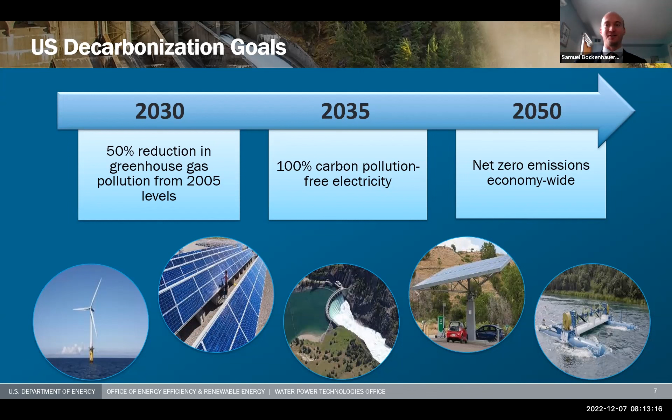I think the importance for hydropower is that it has an important role to play as the system is changing so rapidly. An example is pump storage hydropower, where we're seeing operations changing really rapidly due to more variable renewable energy. The graph shows the Helms pump storage plant in California shifting over years from pumping primarily at night to pumping multiple times during the day as well, to basically balance the variability in solar coming on in the middle of the day in much greater amounts.

Between 2013 and 2015, 2016, you saw a really huge shift that corresponds to that dip in the duck curve on the previous slide. So I think this speaks to the ability of pump storage to enable additional variable renewables to come online, really supporting this expanded deployment of variable renewables.

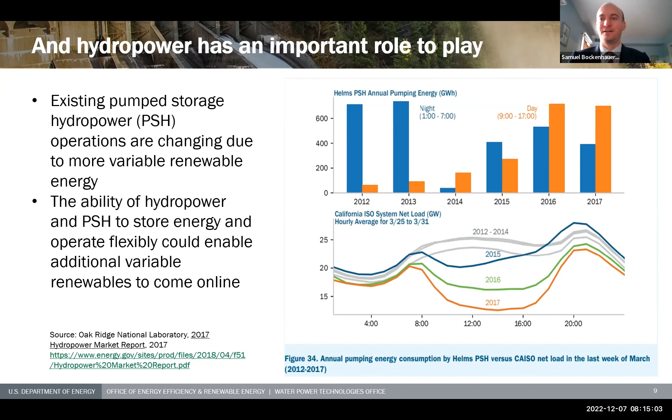We see similar operational changes worldwide, so this isn't just a US thing. I'm showing an example from Japan, the Omarugawa pump storage power station. You're seeing really the same thing: start-stops, a similar measure of pump storage operation changing, the numbers changing quite a bit even in a short span of years, which directly maps to the amount of increased solar coming online, shown in the lower graph. This is in Kyushu, one of the islands in Japan that has a lot of solar coming online.

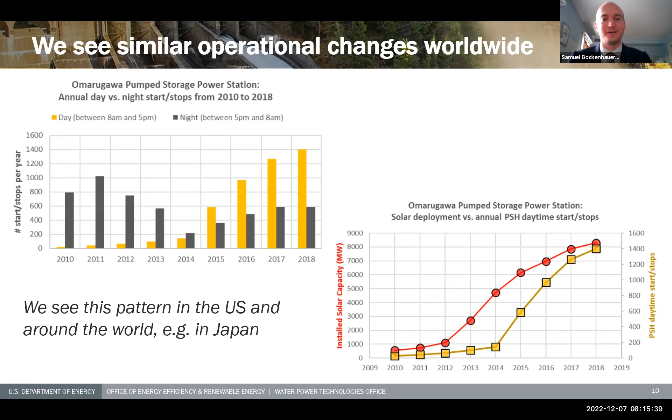There are also new market structures that we're seeing that encourage hydropower flexibility in the US. The Western Energy Imbalance Market is an example. What I'm showing in this graph is just a plant's generation over one day, and you see that it's not a flat line—it's changing quite a bit, moving on even 5 minute or 15-minute increments. These market structures are driven in part by the growth of variable renewables and the need to change operation quickly.

And so hydropower is taking advantage of these opportunities. There are also challenges too: if you're moving so quickly, if you're changing your generation so quickly, you may be increasing wear and tear, and that's something owners and operators are seeing too. But really, this is driven, in part at least, by the renewable generation coming online.

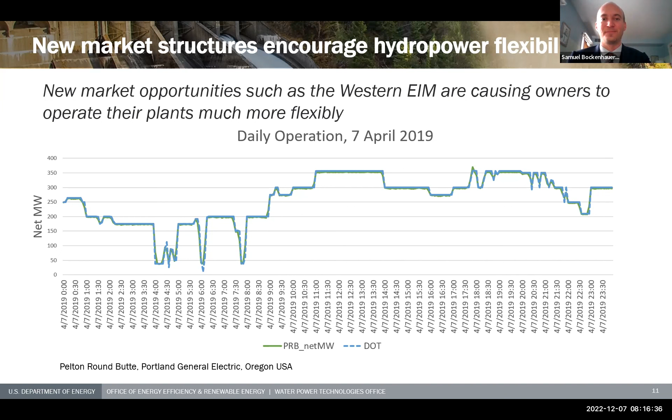And then stepping back a little bit to think about the energy storage role.

So pump storage hydropower, as people on the call may know, is really a battery. It's able to store excess energy the same way that batteries are. But even reservoir hydropower has a lot of storage capability because you're storing water behind a dam.

The International Energy Agency did a rough survey worldwide of how much storage potential there was from pump storage and hydropower. The yellow square is batteries, including EVs. The dark blue square is pump storage worldwide, which is quite a bit larger in terms of energy stored. And if you count reservoir hydropower, it's enormous—much, much larger than either of those two.

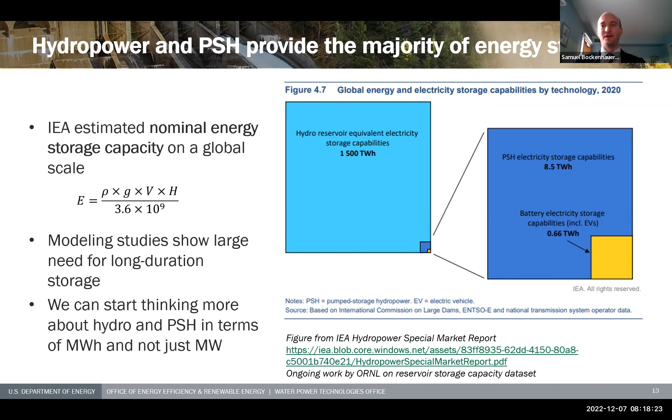I think this speaks to the ability of hydropower to provide a lot of energy storage. It makes clear that we should think about hydropower also in terms of megawatt hours of energy stored, not just in terms of generation. Next slide.

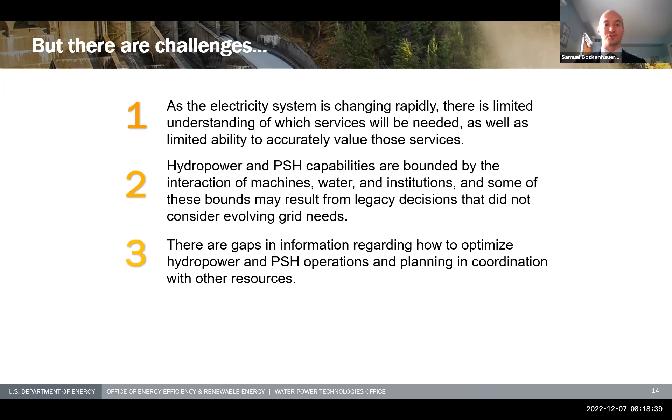So that's kind of how we see the landscape. I think there's a lot of capability that hydropower has, but there are, of course, challenges. As the energy system is changing so rapidly, there's a limited understanding of what types of grid services will be needed—what types of flexibility, what types of storage, firm capacity is really important. And valuing those services is always a big challenge. Who's going to pay for them and how much are they worth? Those are big sticking points and challenges across the power industry.

The second challenge: hydropower and pump storage capabilities are bounded by the interaction of machines, water, and institutions. There's a lot of complexity, and some of those decisions, especially the institutional ones, were made decades ago when plants were built. As we're seeing plants being relicensed, they may be asked to do things that weren't in their original mandate. So balancing environmental impacts is a really critical thing, and I think we'll hear more about that from other speakers.

There are also gaps in information about how to optimize hydropower and pump storage in planning and coordination with other resources. Lithium-ion batteries are well suited to provide some types of storage, but for other types, especially longer durations, pump storage may currently be better suited. Finally, on the technology side, current hydropower and pump storage technology may not always be designed for flexible operation. If you're asking for many more starts and stops per day, or a ramp rate that moves up sharply to balance solar coming offline in California, the technology may need improvements and enhancements. Next slide.

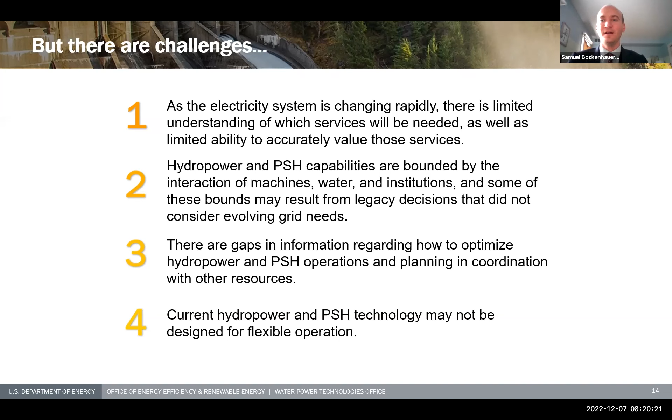There are a lot of opportunities too, and that's the reason we have this work at DOE focused on this issue. The HydroWires initiative, which I lead, is focused on understanding, enabling, and improving hydropower's contributions to reliability, resilience, and integration—really supporting this decarbonizing role of hydropower. Next slide.

We've got a number of research areas and different projects from the DOE national laboratories, industry, and academics, including Sarush and his team in this initiative. Some of the broad areas are organized under: value under evolving system conditions—quantifying the value of pump storage, understanding market and policy implications; and capabilities and constraints—improving capabilities to model hydropower, which is really a challenge due to those conflicting constraints we just discussed.

Quantifying operational trade-offs as well, which I think we'll touch on today. Operations and planning—thinking about how to increase flexibility through operational strategies. And technology innovation—increasing flexible capabilities by developing new technologies, hydropower hybrids, new types of pump storage. That's all within the type of work we try to do. Next slide.

One interesting project for this topic of the role in decarbonization is spurred by this question: okay, hydropower can enable more megawatts of variable renewables because it's flexible. That's something easy to talk about, but at DOE we want to be quantitative and try to be as rigorous as we can with these types of statements.

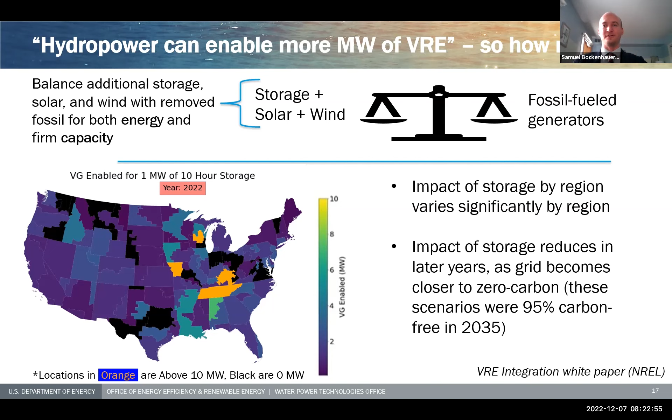Some of the rough results we find, with a lot of caveats, is that storage can enable around 1 to 2 megawatts of wind and solar per megawatt of storage. And 10-hour storage, such as you may get from pump storage, is much more effective at enabling wind and solar deployment relative to 2-hour storage, which would be a shorter duration lithium-ion battery. So this is the type of work that we're trying to do.

Sometimes, even with complicated questions, we need policy rough cut estimates that we try to understand and communicate.

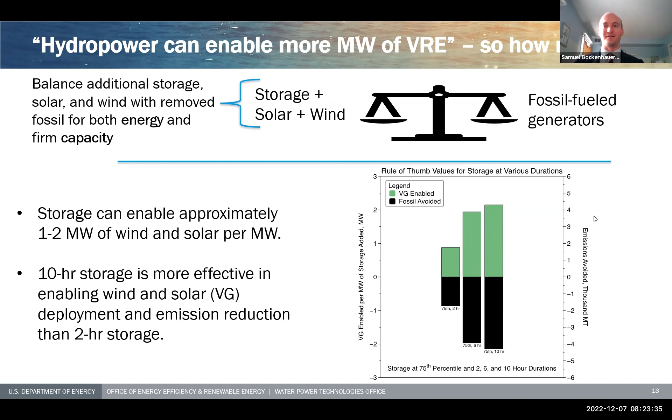Ultimately, what we're trying to find is whether there are win-wins—examples where you could increase flexibility through some operational change or even technology, and also improve habitat downstream for salmon nests or bottomlands habitat or whatever it might be. So there's a possibility for win-wins, even though it's very complicated and you need to look at the full picture.

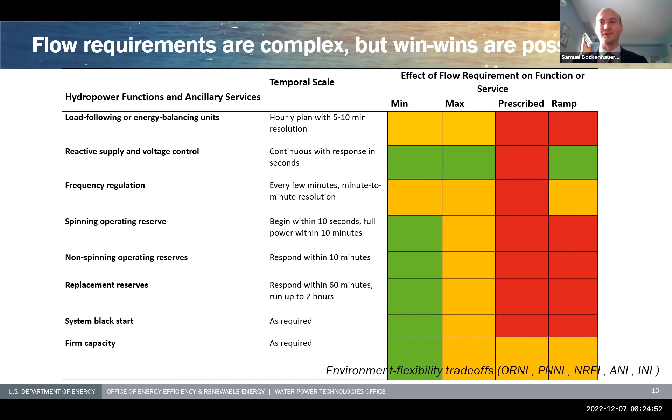We've also got some work on pump storage hydropower—I'll speed up a bit to make sure I don't go over. One myth we sometimes hear circulating is that to build new pump storage, there are no sites available, or it's too hard to find the right site. There are a lot of constraints on where you could build new pump storage in the US.

What we've done is a resource assessment, and we found there are quite a large number—15,000—if you just look at the geography and where it might be possible, excluding national parks and lands that would otherwise not be suitable. That's not to say anyone would ever develop all of these sites, but it's something that can be considered. We're working with developers to make this more accurate and understanding what type of research questions this would spur for us.

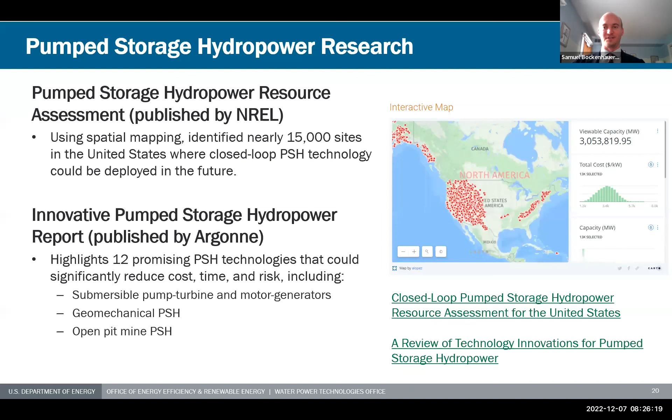There's also some innovative pump storage hydropower work we're funding on completely new technologies that could avoid some of the challenges of deploying conventional pump storage. Is there a way to reduce the footprint of a plant by basically making the turbine underground without a powerhouse, digging straight down and avoiding having to excavate a large part of the mountainside, to save on cost and reduce the impact?

We've also got some other work—just teasers here—on hydropower hybrids demonstration. We've demonstrated, working with Idaho National Lab and other national labs, a way to add a battery to run-of-river hydropower plants to increase their flexibility and allow them to do black start. So if the power system were to completely turn off, adding a battery to these hydropower plants lets them basically reboot the power system, which is something they wouldn't be able to do without that type of hybridization.

There are further out white papers we're working on related to long duration energy storage compensation mechanisms—how can you assure financial return on investment if you're going to build a new pump storage plant, for example?

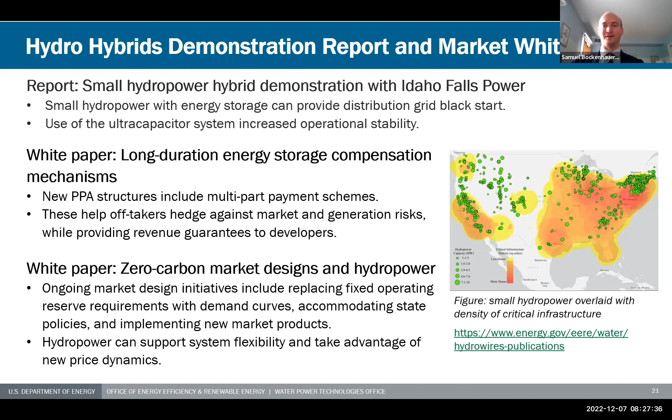On zero carbon market designs and their impact on hydropower: as we get an increasingly renewable system, the entire structure of the market may need to change as penetration gets really high. What does that mean for hydropower? I think the upshot is there could be a lot of opportunity as a flexible resource with inertia that is still able to remain on the grid.

Finally, international collaboration on hydropower. I'd note we're not building much new large-scale hydropower in the US right now, since a lot was built in the past. But there are some new smaller scale projects, and a lot of projects in the pipeline for pump storage.

So we're really looking to international partners for increased learning. There are countries around the world who have figured out how to build pump storage in recent years and been really successful with that. I serve as chair of the IEA Hydropower Technology Collaboration Program, which includes a lot of different work across hydropower.

That's it for now, and I'll close here, but I'd say we are doing a lot of work. I'm happy to talk more to anyone interested, but the point is, hydropower is complex. There's a lot of opportunity there, and there are challenges, but we do see it as part of the climate solution, and that's why we're supporting this type of work. Thanks.

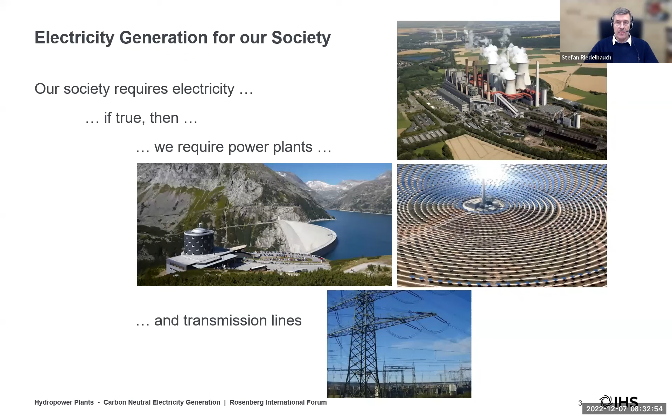So with these options, the real remaining question is which of the available power plant technologies do we want to deploy? It's clear that all power plant solutions affect the environment—air, rivers, ocean, soil—and that affects plants, animals, and humans. The real question is, what are the ethical criteria for the decision? Is it renewability, sustainability, or pure economic considerations? That's what we have to decide.

With this presentation comes a plea for the utilization of hydropower technology, because I'm really convinced that this technology supports renewability and sustainability as it should be.

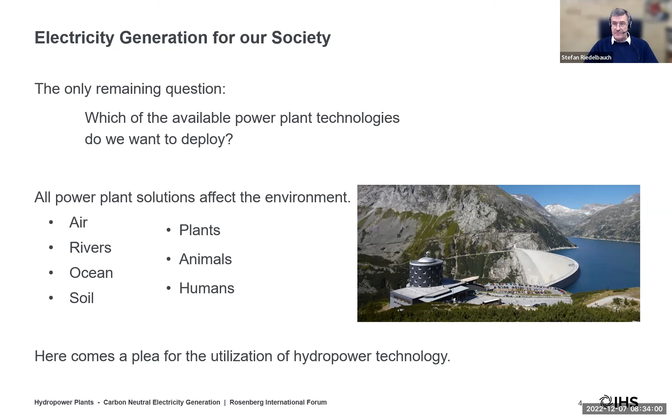The water which is moved from the ocean up to hills and mountains represents an increase of potential energy, since the water is lifted higher than sea altitude. Then if it moves back down to the ocean, we have kinetic energy. Hydropower plants convert both potential energy and kinetic energy. So hydropower is driven by solar power in an indirect way, and this is a truly sustainable and renewable energy source.

A possible definition of renewable energy is that it is energy collected from renewable resources that are naturally replenished on a human timescale. This is certainly true, because if the sun didn't exist anymore, life on Earth would be very unlikely.

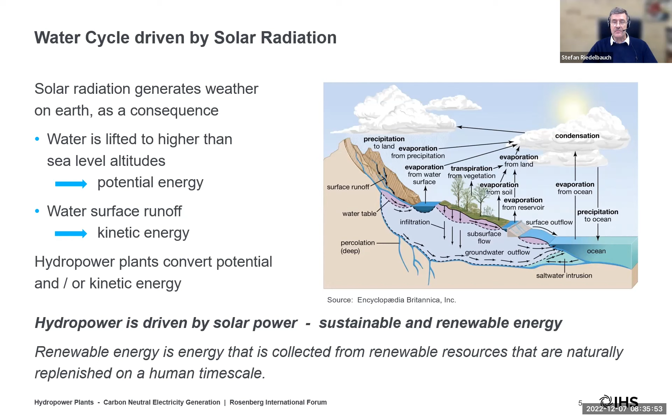Here comes a couple of examples for potential energy conversion. We see different types of hydropower. One is a pumped storage plant, Raccoon Mountain in the United States. We see the upper reservoir here; the plant is somewhere in the hill, an underground cavern powerhouse, and this is the tailwater, which I believe is the Tennessee River. So this potential energy difference can be exploited and converted to electricity, and vice versa.

Electricity can be converted into an energy reservoir here. Very similar systems are also available in Austria. You have pump storage plants, or just storage plants—in this case Cana Brava in Brazil—which can be used as base and peak load. This is also true here, but we will see that these kinds of plants are typically used for frequency control.

So this overall system is really a conversion of energy without thermal processes. This means we can have continuous electricity generation, kind of as a base load, but we can also have very fast power changes to support the stability of the electrical grid. This is really a key advantage, because everything in the power plant business related to thermal processes is relatively slow.

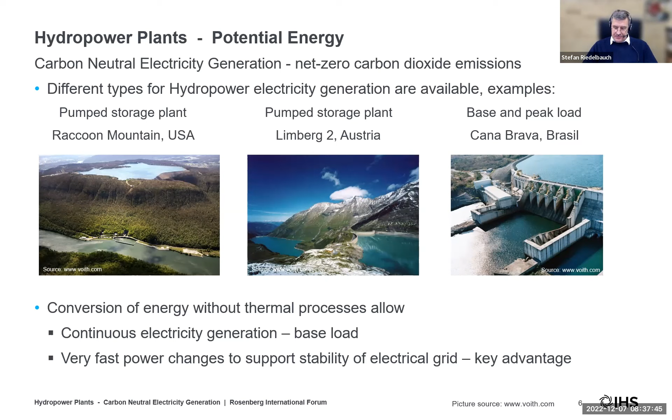Another truly renewable and sustainable energy resource comes from gravity, based on mass attraction within our planetary system. We have the sun; the Earth rotates around it and moves around the sun; the moon rotates around the Earth, which is also rotating on itself. This is again truly renewable and sustainable, because if the sun didn't exist, mass attraction would disappear too, and no life would be possible anymore.

Gravity forces in certain parts of the world generate tidal currents. Very high tide and low tide occur here in the Bay of Fundy in Canada. The elevation change of the water level of the ocean is very large, which means that somewhere in a narrows we have very large tidal currents. The advantage of converting this to electricity is that tidal currents are very well predictable, and therefore the electricity generation is also very well predictable.

This prediction is less reliable for wind and solar generation, because if you have clouds, or just no wind, or cannot predict very well, you always have some uncertainty and very much fluctuating electricity generation. But with tidal energy, it's well predictable and foreseeable.

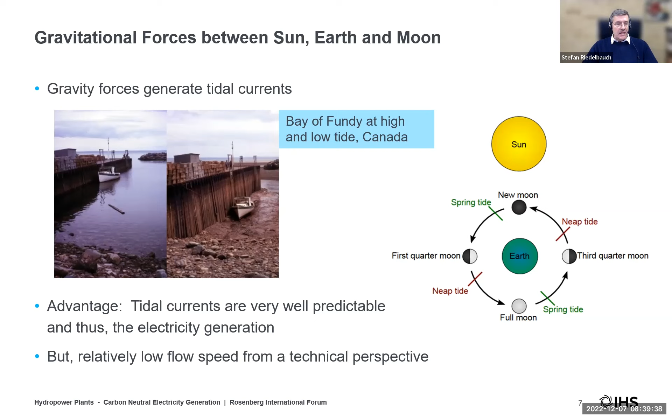An example for the conversion of tidal energy is this system, a floating trimaran. This is a view from above, and here the trimaran with a view from below. This device is anchored and sits at a specific location, and in this case has six propellers which convert tidal current into electricity. You need to have some cable towards land, and so forth.

As an example, at our institute we made some simulations of such a configuration. You see a cut here through the flow field, showing the six propellers and their respective wake flow. We can identify the interference between those propellers and also predict the performance of such a device under the given tidal conditions.

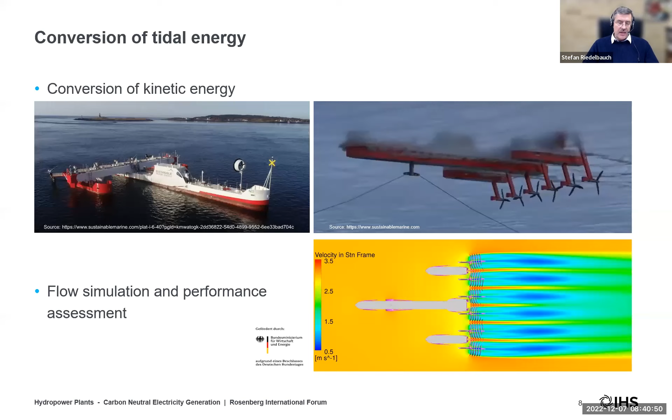There are other concepts which convert kinetic energy, concepts like propeller turbines, very similar to wind turbines, or shrouded propellers, which could be used in rivers because of the limited height and limited depths of the rivers. Those are really for pure kinetic energy conversion, and those would serve essentially as base load.

When we look at tides, this is an example of a performance prediction of a project area, in this case the European Marine Energy Center. We see here the back and forward flowing tide. We can simulate the tidal current and then add a large turbine array - all these dark dots are turbine arrays, turbines. Based on the tide, we can predict the power generation of each individual turbine, and also the interaction between those turbines, to find the overall performance of a project area. In this case, I believe there is something like 300 turbines in this turbine array.

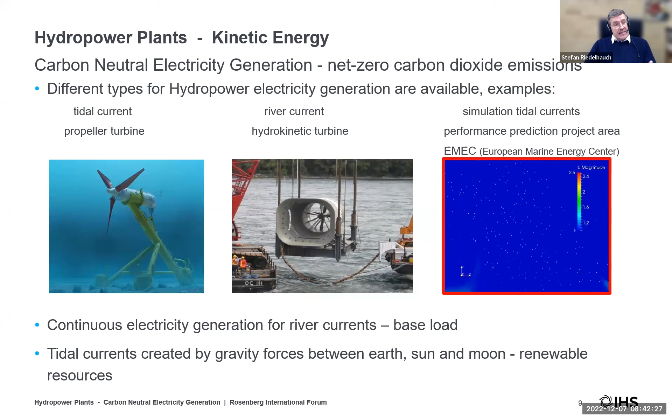So these are the possibilities which I consider to be relevant for hydropower, and then we want to compare this to the requirements and the properties of the electrical grid.

We see that the power demand is constantly changing, varying all the time, and we have seen this in the earlier presentation of today. But it's also a fact that the electrical grid as such has no storage of electricity - there is only conversion. We can use batteries, but this is energy conversion. We can use hydropower pump storage plants, which is also energy conversion. So if you want to really have a safe and balanced electrical grid, we need prompt generation of electricity.

This can be visualized like this. We can state that the grid frequency really is a measure for grid stability - like a balance, we have on one side consumption and on the other side generation. Don't worry about the frequency value itself - this is for Europe, in the United States you might have 60 hertz, but it's the same principle. So if consumption and generation is really in balance, we have probably a nominal frequency of about 50 hertz.

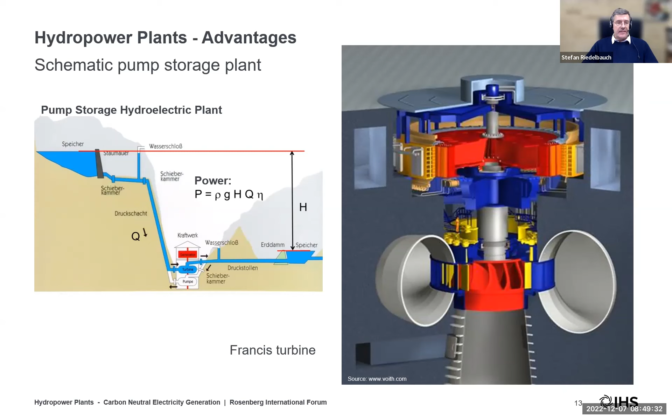An example for very fast reaction times, which are needed for this flexibility of our electrical grid, is presented here. This is a pump storage plant in southern Germany, and a schematic about operational transition times.

We have a standstill condition, and if we want to go to generating mode, we can come up to synchronous speed of all the rotational masses within 70 seconds. Then the generator is synchronized but still has 0 megawatts. In another 30 seconds, we can increase the power up to the maximum power of the individual unit. In this particular case, there are 4 machine sets, so in total this plant has almost 1,000 megawatts.

The same is true for the pumping operation. We can go from standstill within 105 seconds to a consumption of almost 250 megawatts, and this would be possible for all 4 machine sets, so consuming roughly 1,000 megawatts. Also from pump to generation, the conversion times are very short.

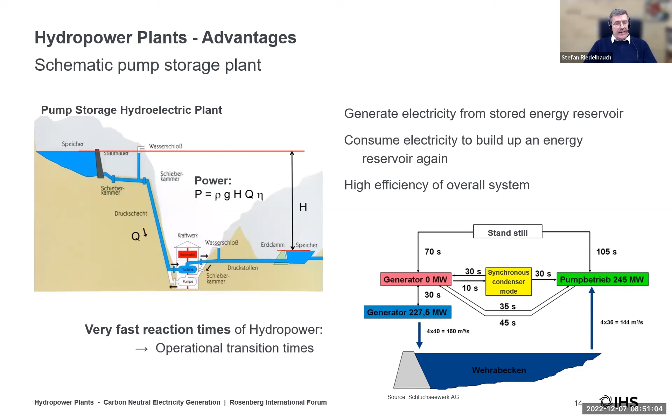So maybe give me four more slides here.

If you look at research requirements, because of the high flexibility needed and fast operational changes, we need to look into flow simulation, which defines the loading of machines, structural dynamics and the answers related to lifetime, plant dynamics for fast operational changes, or combining all of this, as well as model testing and so forth.

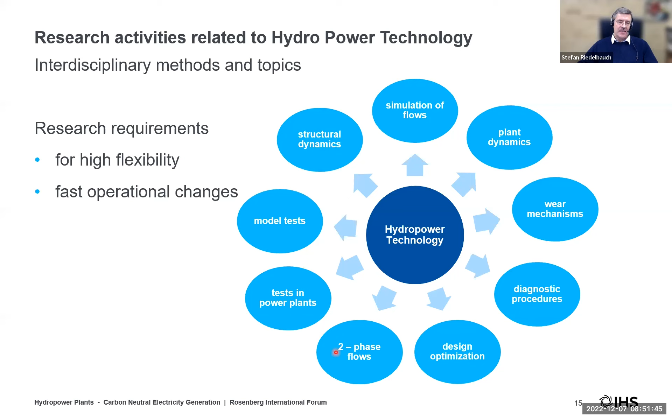As the time is relatively short, I prefer now to jump into 2 or 3 examples. This is an example about operational transients in turbomachinery, where we can predict the behavior under operational transients of such a plant, which is a real plant in Spain in this case, and see what happens.

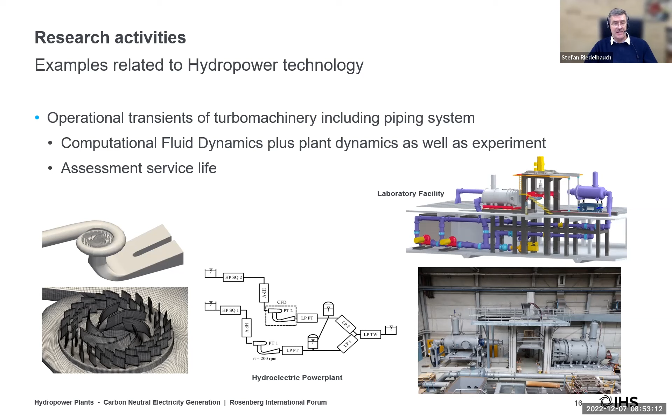What happens if such a pump turbine moves from a steady state pump operation point towards a steady state turbine operation point? We are working in our institute on these kinds of problems. Because this involves very complex and challenging numerical approaches, we may want to validate this, and in our lab we have such a laboratory facility—this is a real view of it. It's a relatively large facility, able to perform operational transient simulation in an experimental way, and with an instrumented model turbine we can find dynamic strains and stresses within turbine equipment.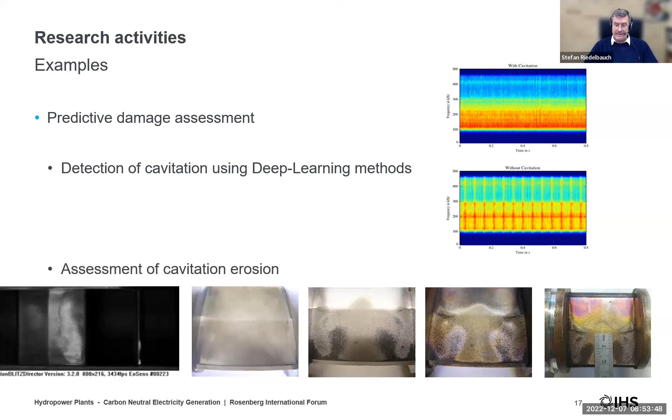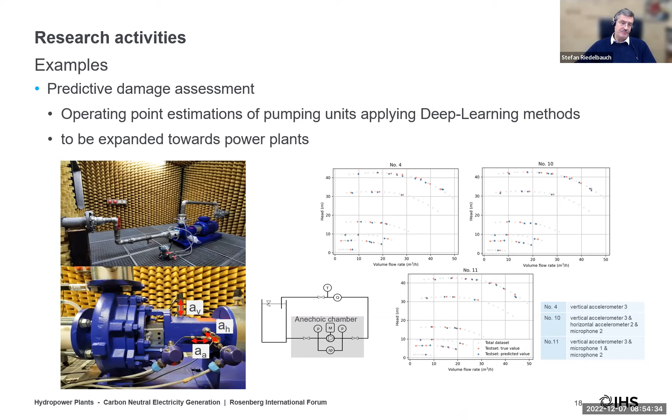A third example is operation point estimation on pumping, again using convolutional neural networks. We have a simple pump equipped with sensors to gather a lot of data, and we see to what extent we can predict the head flow curve, the typical pump characteristic, based on those signals only. In this example, all the gray points are the learning data, while blue means predicted value and red is the real test value, the ground truth.

For exactly predicting the loading within a turbine, we need very accurate prediction of flows in the turbomachinery, not only for optimum conditions but also for extreme off-design and operational transients. For this, we look at very large flow simulations, which at maximum may have 100 million flow elements, using a very large supercomputer at the University of Stuttgart. This lets us predict relatively accurately the loading of the machine, and then come up with fluid structure interaction topics to assess the lifetime at extreme off-design conditions relative to optimum conditions, as well as operational transients. So it's basically a prediction and simulation of forced vibration.

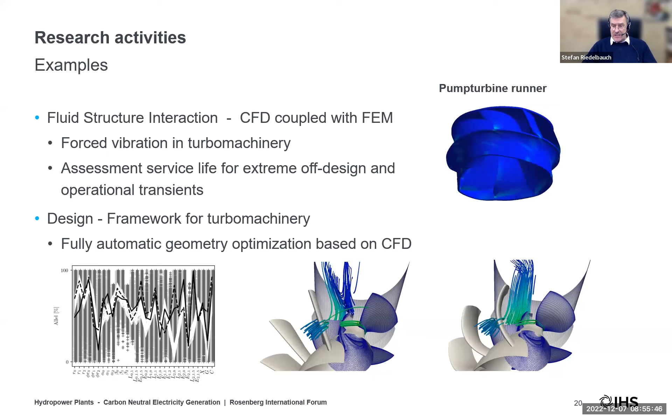I'll skip the lower part and come to almost my last slide. This again shows the European Marine Energy Center in Scotland, the Orkney Islands, where there is a large number of tidal current turbines. The same systematics and methods can be used for river flow prediction, because for these hydrokinetic turbines, you again want to identify locations with high flow speed to get maximum conversion of electricity.

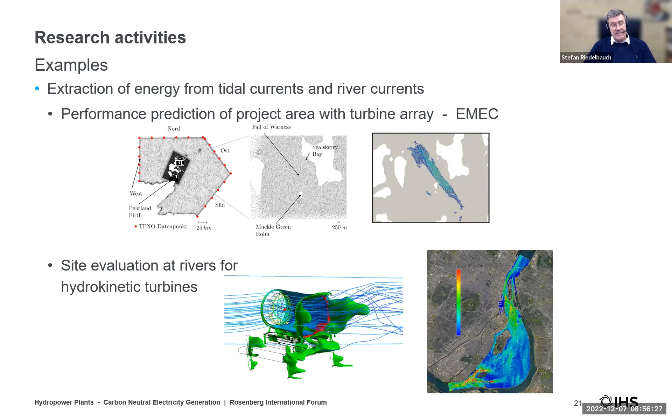As a summary, hydropower plants have very high efficiency levels of energy conversion compared to all other power plants. They have very high flexibility and capability for fast and very fast power output changes within one minute or less, and excellent capability for stabilizing electrical grids with a high share of volatile renewable energies such as wind and photovoltaics. Of course, hydropower plants are typically multi-purpose plants.

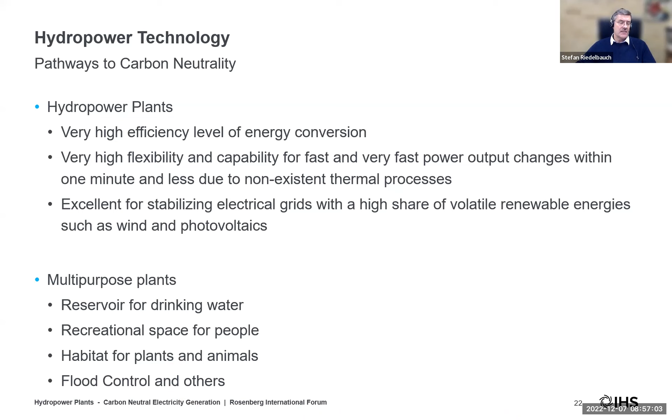Thank you very much, Professor Riedelbauch. Two excellent talks on hydropower, one from a top-level research program point of view, and this one more from a technology point of view.

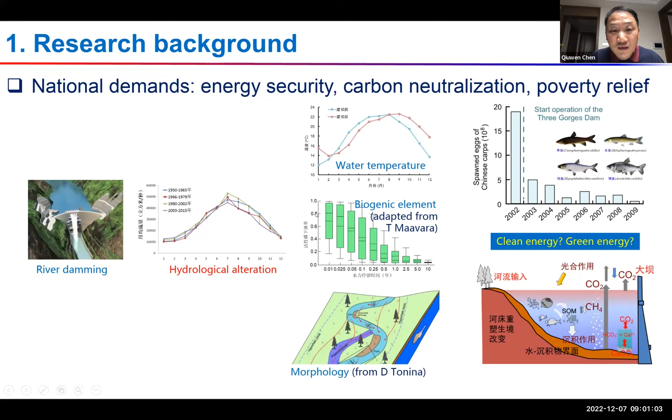So I will give my talk focusing on two research areas. One is the Upper Yangtze River, where we have 5 dams in cascade. The other one is the Upper Mekong River, which has more than 11 dams, but I will study 5 of them.

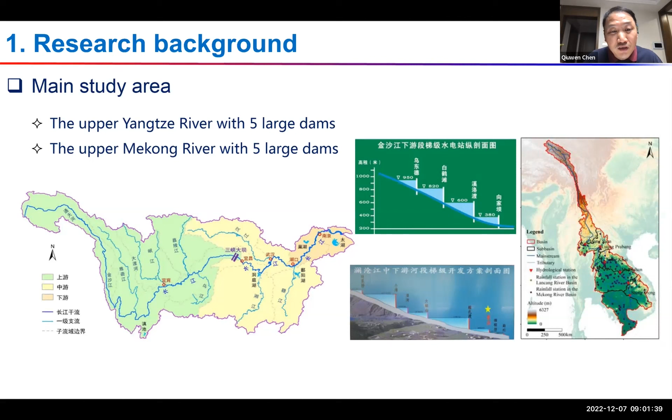In China, the eco-environmental impact has been studied for a long time. Why do we continue this work? Because in China, we like to build high dams—we have dams more than 300 meters in height. So the impacts are somehow different from others around the world.

So now I would like to give some information about our recent research on the impact on biogeochemical cycles. Where's the knowledge gap? For instance, in the publication from Taylor Maavara at Yale...

She reported that the retention of nitrogen and phosphorus will increase with time. However, in the Mekong River Commission report, before and after the impoundment of the cascade reservoirs, the bioavailable phosphorus increased with time. Of course, urbanization and population increase will have more input of nutrients. However, the point is not only that the amount is increasing, but also that the species composition of the nutrients is different from upstream to downstream along the reservoirs.

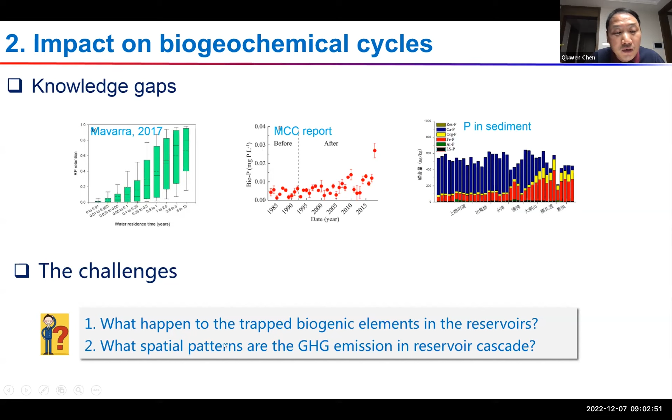So the question is, what happened to the trapped biogenic elements in the reservoir, and what's the spatial pattern of the greenhouse emissions in these reservoirs? So we did a lot of sampling along the reservoir for a number of years.

We found that after river damming, although the total nitrogen and phosphorus don't have much change, the composition changed a lot. From upstream to downstream, the phosphate increased, but the total nitrogen kept stable. Also, from upstream to downstream, we found the total nitrogen is almost stable. However, looking at this figure, we found that ammonia increased and nitrate decreased. Then looking at the composition of the minerals, we found calcium decreased, but the ferric iron increased.

So we proposed a conceptual mechanism: after river damming, the water becomes stagnant somehow, and this stimulates the growth of algae, which absorb the nitrate and dissolved phosphorus. After the death of the algae, they sink down. In the deep reservoir, there's an anoxic layer, and due to reduction, we get decay of the organics, which produces ammonia. Also due to the reduction environment, we get the release of phosphorus, which is the reason that stimulates or increases the delivery of bioavailable nitrogen and phosphorus downstream.

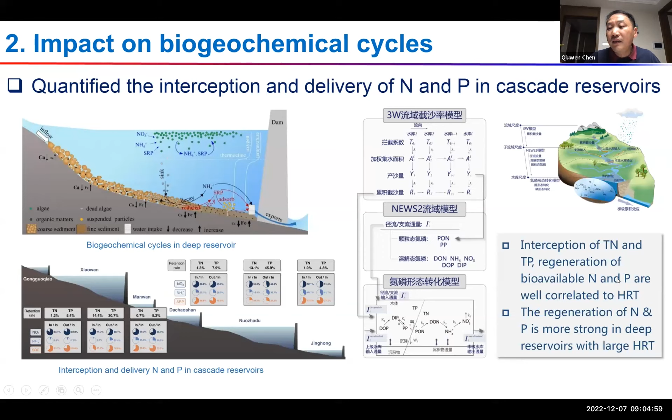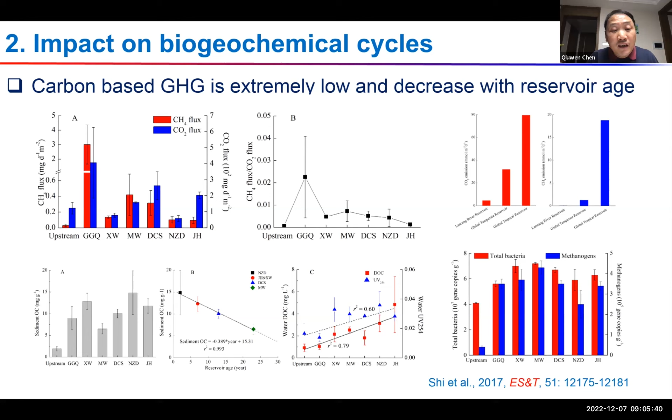Regarding greenhouse emissions, we also looked at the cascade reservoirs from upstream to downstream along the Upper Mekong River. We found that in the reservoirs, the emission rate is far below the worldwide average. In particular, the emission rate decreased with reservoir age, which is very interesting, because in many reservoirs it increases—but why does it decrease in the Upper Mekong River? Because it has a very narrow watershed and the input is small. The emissions mainly come from the original deposit of organics.

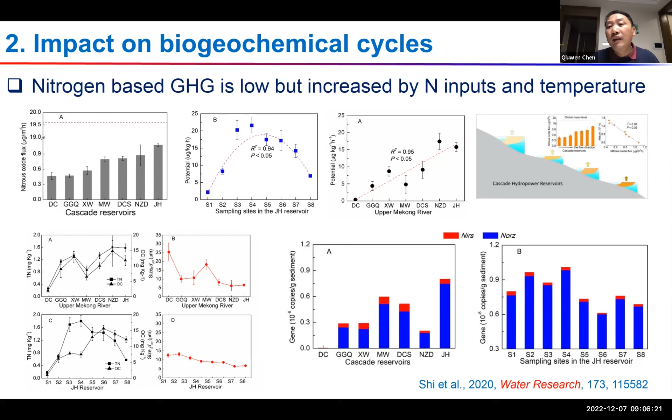Also looking at nitrous oxide, the average value is also far lower than the global average. But importantly, from upstream to downstream there is a slight increase of nitrous oxide. However, this increase is not caused by the reservoir, but caused by the increase of temperature and the increase of nitrogen input. That's the reason—actually, the reservoir doesn't make much contribution to the increase of nitrous oxide.

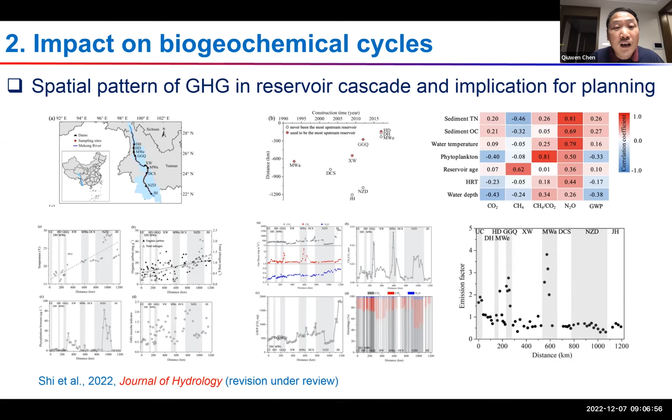So we made a spatial pattern analysis of greenhouse gas emissions in a reservoir cascade, and we found that for the top upstream reservoir, it will be better to build a bigger one which can intercept most of the organics from the catchment. Because it's a deep reservoir, we can reduce the increase in greenhouse gas emissions. That's our research result for the future planning of hydropower reservoirs.

The second part is about fish conservation in river damming. In China, we have large reservoirs, and because of the high depths, we have stratification in the reservoir. In summer we have cold water, in winter we have warm water, and this changes the water temperature regime downstream and affects fish spawning.

Also, in the reservoir section, there was originally a high rapid flow, or lotic condition, but after impoundment it becomes a lentic condition. So the fish which spawn drifting eggs - could they have a habitat for reproduction? That's the question: the physiological plausibility of reservoir ecological operation for downstream.

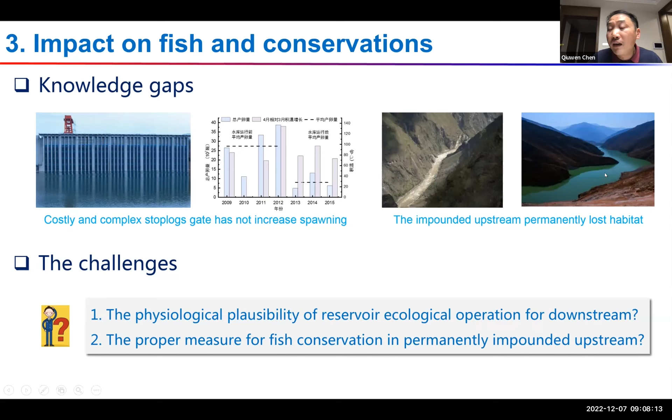The other question is, if we build a fish passage and move the fish upstream, can they survive, or can they find a proper habitat for reproduction? So we first did a flume experiment in the laboratory to test the required velocity.

We tested the required velocity and the increase of velocity needed for fish reproduction. We found something very interesting for the Chinese four carps, which are very important commercial fish for our food security: a pulse of high velocity is important for spawning, and a low velocity is important for hatching.

So each year, at the end of May to June, we need to increase our discharge from 12,000 over 4 days until 18,000, to trigger or stimulate the spawning of the fish. Then we need to reduce the discharge to decrease the velocity, so the eggs can fertilize and then hatch.

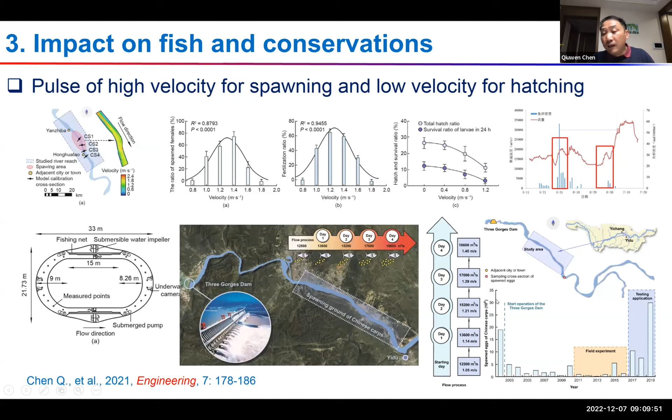That's very important. After the experiment starting from 2011, we found a very sharp increase of juveniles. If we look at the figure at the bottom, we can see after 2011 an increase of fish eggs and also juveniles year by year, until 2019 when it almost reached the level before impoundment.

The other important finding is the time match between the accumulated water temperature and the critical temperature needed to stimulate spawning. What does this mean? Fish spawning requires a kind of gonad development. In winter, when warm water is released, the gonad development is faster.

However, in the next year, in spring, cold water is released. So when the mature eggs need to be released, the critical temperature is not reaching the required level. There is a mismatch between the two temperatures.

So we need to operate the reservoir to release cold water in winter and warm water in spring, to match the timing and stimulate fish spawning. After this experiment, we found that fish spawning activity increased sharply.

Then we needed to develop an optimized model for discharge and temperature operation. We have an objective function for hydropower production, and constraints including E-flow (ecological flow demand), water temperature regime demand, and navigation. We built our model and used numerical methods to solve it, getting Pareto non-inferior solutions, from which we can find a proper one.

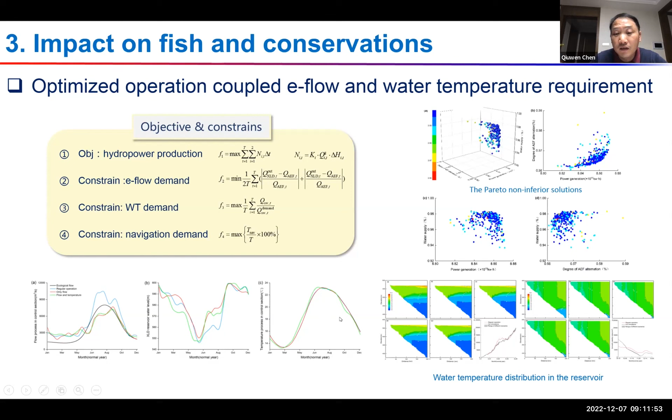After getting the optimal solution, we can know the discharge curve and also the temperature curve needed for downstream fish spawning.

However, for the upstream, as I said at the beginning, the river reach changed from a lotic one to a lentic one. So if the dam is more than 200 meters high, it's actually irrational to move the fish from downstream to upstream. So how do we protect the fish species upstream?

The way is to find a tributary for habitat compensation. First we need to identify which tributary is the proper one and which is the target fish. So we use environmental DNA to do the analysis and survey, and then we can determine which tributary is suitable.

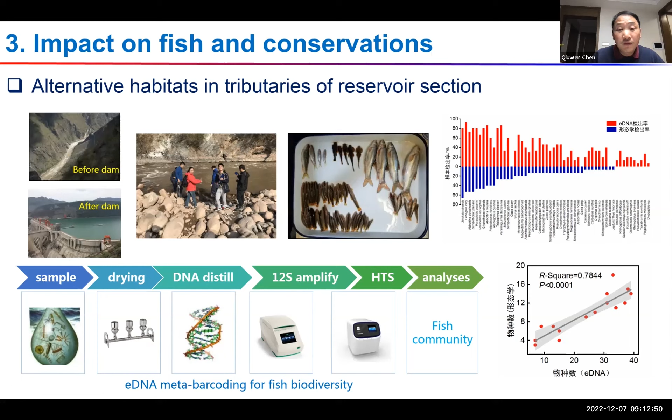For instance, there are a number of tributaries, and this is the main stream. So we need to find which tributary is proper for which type of fish, and then we have to do a survey of the habitat preference of the fish.

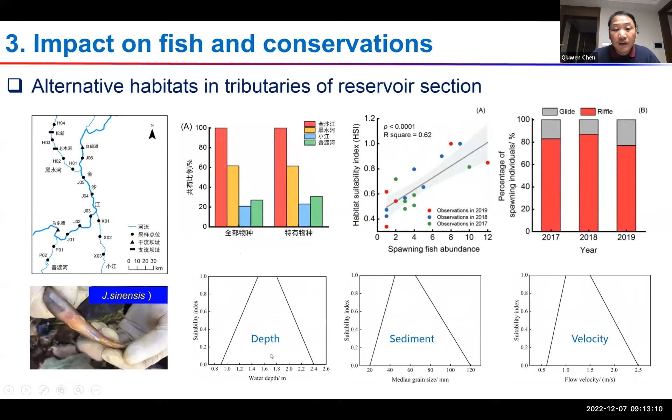For instance, the preference to the depth, sediment, and velocity, and then we build up a kind of habitat model, and then we can use our model to simulate the habitat suitability for different tributaries.

And if the stream is not good enough, we can do some engineering work to improve it. For instance, remove some small barrier or dams to improve the connectivity, because if the fish spawn in the tributary, they need a sufficient distance for the drifting eggs to develop to juvenile. So we need to remove some barrier.

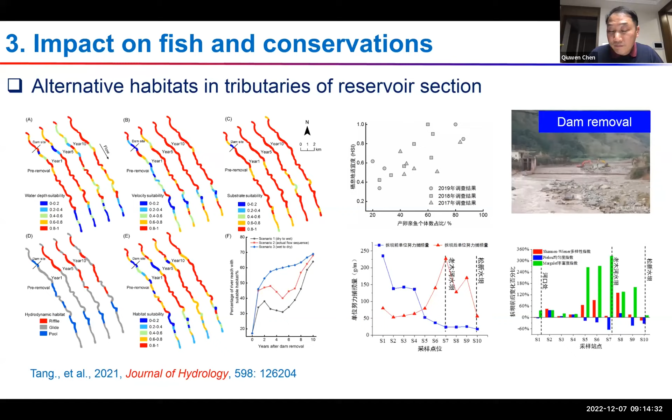This is a simulation result of the habitat suitability for the target fish. This result shows before and after the removal of the dam in the tributary, and the increase of the fish. We can see after removing one dam, the fish increased from downstream to upstream, which means the fish moved from the estuary, the confluence of the tributary, to the upstream of the tributary for spawning and rearing. So this is mostly my talk today.

So I would like to say the reservoirs can intercept the total phosphorus and nitrogen, but they can modify the nutrient bioavailability downstream due to the biogeochemical process in reservoirs, particularly in deep reservoirs. The other one is the reservoir in the upper Mekong River has very low greenhouse gas emissions, and the river damming doesn't increase the greenhouse gas emission.

The ecological flow can improve the fish spawning, however, it's not enough. Mostly, it's important to operate reservoir for the ecological flow and the water temperature simultaneously. And finally, tributary can provide a kind of alternative habitat for the impounded mainstream.

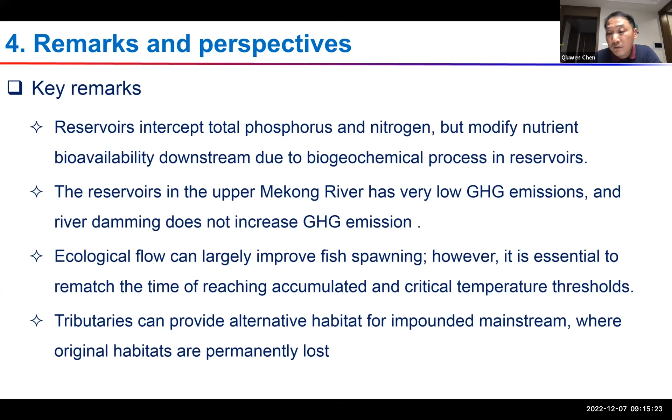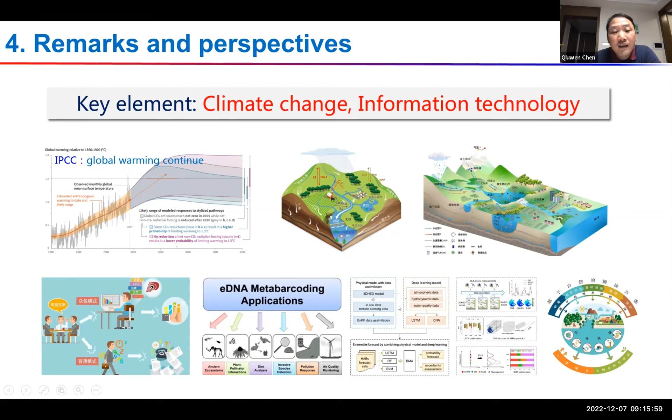So in future, we will focus on two other elements in hydropower development and ecosystem protection. One is climate change, because climate change will alter our inflow and also the temperature regime. The other one is using more advanced information technology, for instance DNA metabarcoding, and also some other model simulations, to improve our understanding and conservation measures for the dam waters.

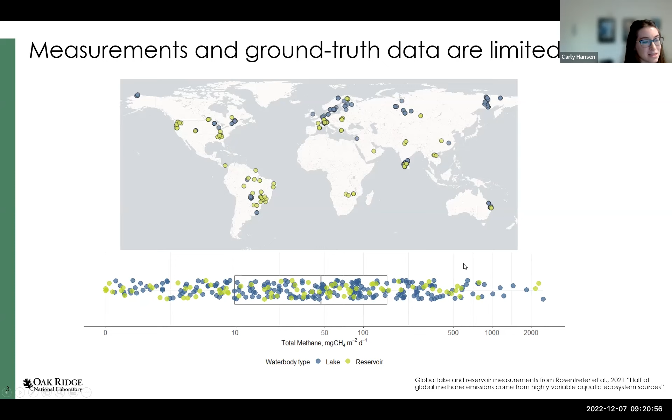A recent paper on global methane emissions from all aquatic ecosystems, not just lakes and reservoirs, compiled measurements, and you can see for lakes and reservoirs just how sparse these measurements are throughout the world. The emissions vary over several orders of magnitude, and again, this is just from relatively few sites.

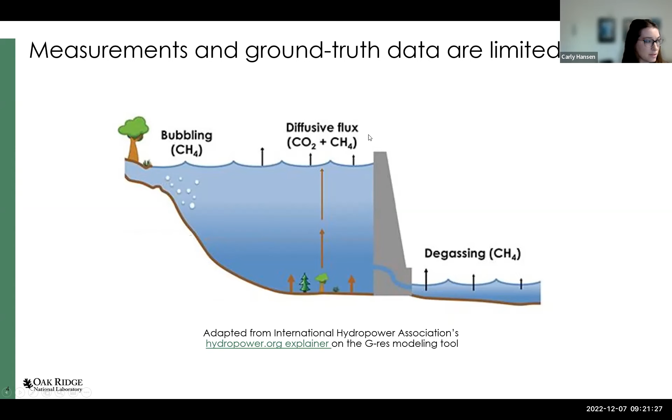Methane and carbon dioxide can reach the atmosphere through several pathways: bubbling up through ebullition in shallower parts of a water body; degassing that can occur when you have a sudden pressure change, with methane-rich water from deeper in a reservoir passing through a turbine; and also diffusion of methane and carbon dioxide.

Looking at these measurements, this is from a different database compiled by the International Hydropower Association. Folks there developed a tool called G-res, aimed at helping people develop greenhouse gas footprints. It facilitates getting information together about land use, reservoir characteristics, local climate, and water quality conditions, and helps calculate an estimate of greenhouse gas emissions pre and post impoundment.

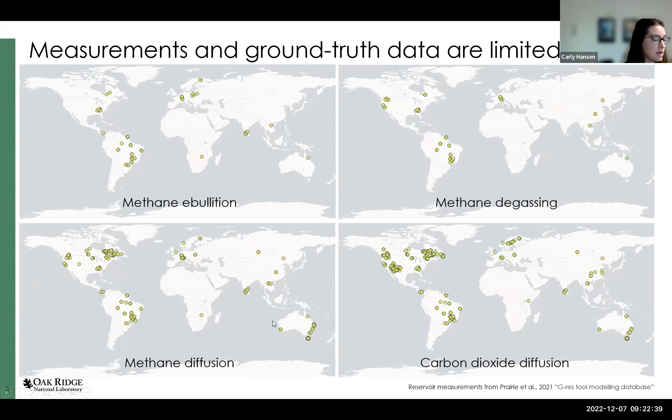But underlying this tool is a database of reservoir measurements, and again, just like the methane specific measurements shown earlier, these measurements are still pretty sparse. You can see these different pathways of ebullition, degassing, diffusion, and carbon dioxide diffusion. There are little clusters throughout the world, but again, pretty sparse, representing relatively few water bodies.

Another way of looking at this limitation of the underlying information and measurements of greenhouse gases is by seeing different types of coverage that these measurements provide. On the left, you see the actual values, the fluxes that have been measured, and then there are different periods that have been used for sampling.

Some represent only portions of the year, and that really varies by the pathway of emissions. Many reservoirs were only sampled for a portion; some represent annual conditions, and others just the ice-free period. In other words, the measurements are not consistent. On the right, you can see a breakdown of emissions measurements for just the US, comparing the different time frames over which these measurements were taken, which varies regionally too.

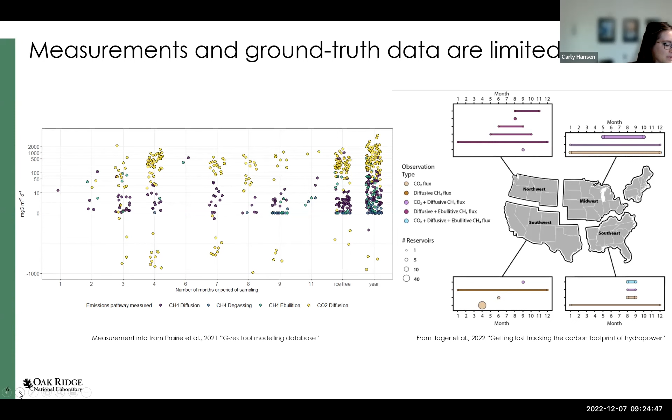So again, you see a lot of inconsistency, and the big takeaway is that it weakens the confidence and robustness of any empirical relationships. Statistical models that estimate emissions based on factors like size, age, or local climate aren't as strong when you have this variability in the observations used to develop those relationships. Ultimately, this also means we have less data for validating process-based models of greenhouse gas emissions. This limitation in measurements is really a difficult thing for modeling, and can be a significant challenge.

This variability in where water is, or the size of a reservoir, contributes to issues with uncertainty and scaling up whenever you're dealing with areal fluxes, or averaging an observation over the area of a reservoir. If that area itself is changing, that creates some pretty foundational issues. Many studies report emissions as total emissions per unit area, which can be problematic if that water body size is changing.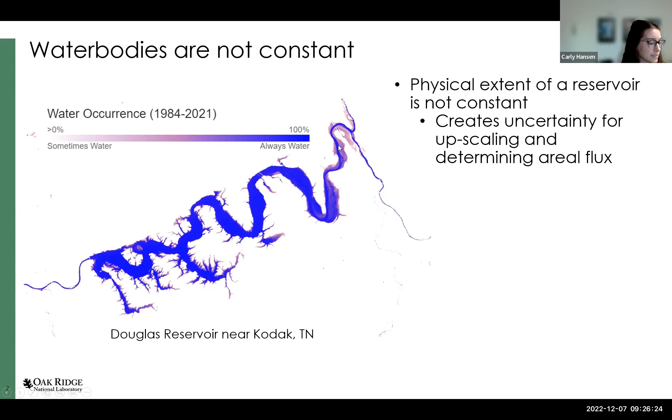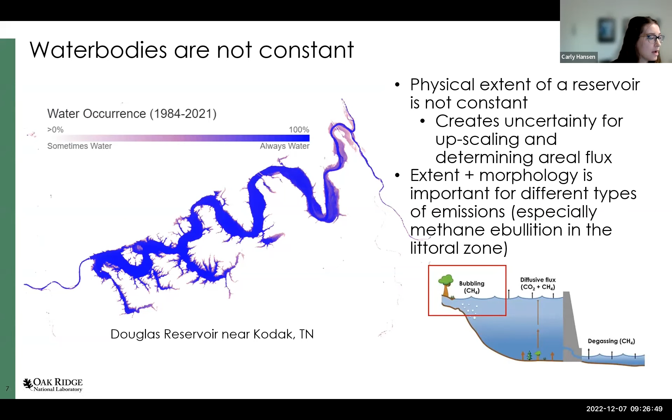Additionally, if water body size is the predictor for emissions, as it sometimes is, especially in some of these smaller coves and at the river-reservoir interface, you see a lot of variability in the surface extent there. That's really important, especially for methane ebullition. In this figure, you see the bubbling and ebullition concentrated in these shallower zones. So if you have a lot of fluctuation happening there, that can create a problem for your measurements, but also when relating that or developing relationships and empirical models.

Another way to think about variability of water bodies is that the volume and depth are changing, not just the extent, and that varies throughout the year and from year to year. On top, this is the normal operating range for Douglas Reservoir, storage or volume of water in million cubic meters. Between the upper and lower bound on this normal operating range, it's about 600 million cubic meters, which is about a third of the total capacity of this reservoir. So it's a significant amount, and I just want to emphasize that.

But Douglas Lake is not unusual. When you look at the large reservoirs in the US, these are most of the reservoirs from the GRAND database that are in the US. If you look at that range between the upper and lower bound of operating range or operating storage, the median for both the non-hydropower and hydropower reservoirs is about a third of the total reservoir capacity. So again, just a lot of significant fluctuation. That makes it really important to consider what's actually happening, what's in the reservoir when measurements are taken, and to take into account that there could be big changes in volume over the life of the reservoir, and that volume and depth fluctuation should probably be taken into account or modeled, especially if looking at emissions over time.

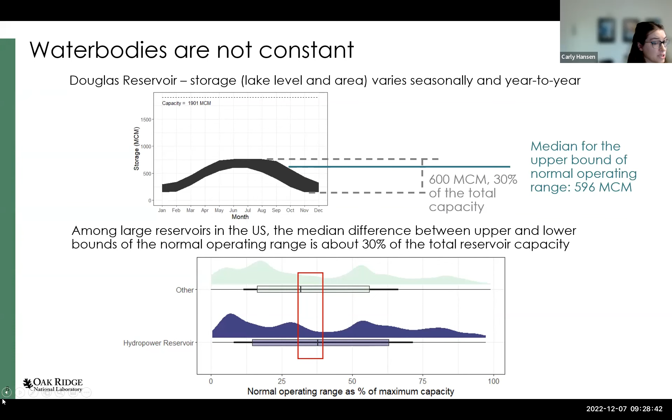But the water bodies aren't the only thing changing, and the surrounding area is changing as well. This example is a reservoir in Iowa, the Red Rock Dam near Des Moines. It's in a heavily agricultural area, and Des Moines is a pretty big city with lots of development. You can see the changes in land use over time, and that really could have an impact when you have different activities and watershed management strategies that might be changing, resulting in differences in nutrient loading and wastewater inputs to a reservoir.

Additionally, this is a big topic with the growing issue of wildfires and drought impacts on land cover and hydrology, especially in the Western US. It can really drastically change the carbon nutrient input and the hydrology, which could very much alter water body emissions and driving processes in the reservoir. So lots of changes nearby that could have big impacts.

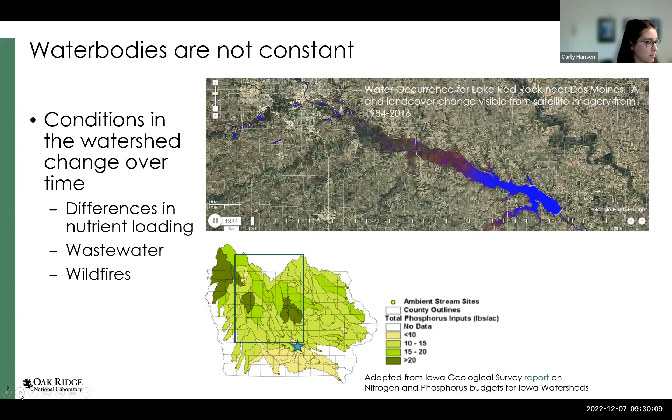The last aspect of change that I want to highlight is the local climate. In this map, you can see for the United States how climate classes are projected to change from the recent past to the end of the century. In the example that's highlighted, there's a hydropower and water supply reservoir in north central Utah, Jordanelle Reservoir. The watershed is not heavily developed, but it happens to be located in an area that's projected to have a really big shift in climate, with increasing temperatures as it shifts from warm to temperate dry, and shifts in the timing of precipitation.

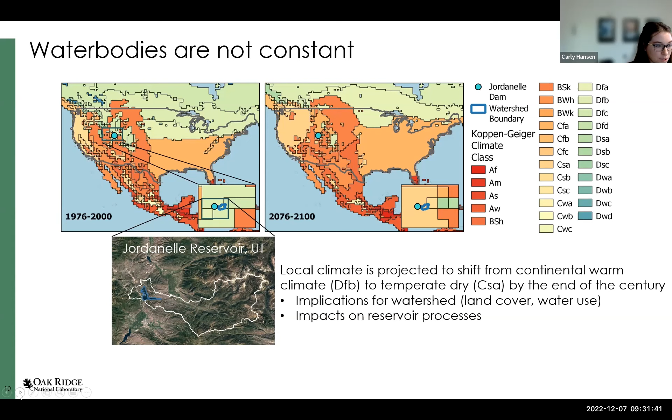So what that means for the reservoir and the greenhouse gas emissions is impacting thermal stratification, impacting local hydrology, and that has a lot of possible follow-on effects which could really change how carbon's processed in the reservoir, and other associated driving factors or processes like eutrophication, which could contribute to and impact greenhouse gas emissions.

There are a few other considerations I want to highlight, in addition to measurement limitations and the different types of changes that could impact emissions. The first is that water body data sets can be really inconsistent. This is really relevant for large scale modeling, which often relies on GIS data sets that are really large scale. But it's important to acknowledge that these data sets don't always talk about water bodies in a consistent way.

To illustrate this, there's the Grand Coulee Dam, the biggest hydropower generator in the US. But the impoundment behind the dam, known as Lake Roosevelt, does not exist in some water body data sets. In some data sets, it's classified as a lake instead of an impounded reservoir, sometimes as a reservoir, and sometimes as a stream or a river. That could really change things, especially as you increase the scale of modeling or talk about emissions with respect to different sources and assigning those to the source of an aquatic ecosystem. If water bodies aren't consistently described, you could end up with inconsistencies just because of which underlying data set you're using.

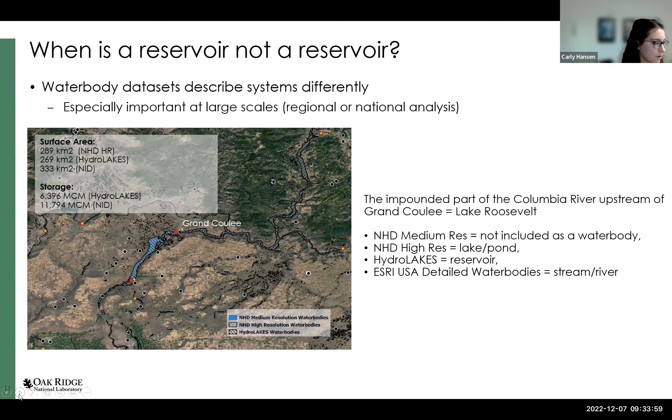Another point on this: it's really critical that we understand which water bodies are rivers and which are lakes or reservoirs, because certain relationships, like the processes driving ebullition or diffusion in a river, may not hold for lakes and reservoirs. So it can make it really tricky if some relationships don't actually apply.

So some impoundments actually have really minimal storage and look or act more like a river than a reservoir. And the measurements from the global methane study I showed at the very beginning show there's quite a bit of difference in methane measurements at rivers versus those in more lentic systems. So it's an important delineation, but one that's not as straightforward or as consistent as you might think.

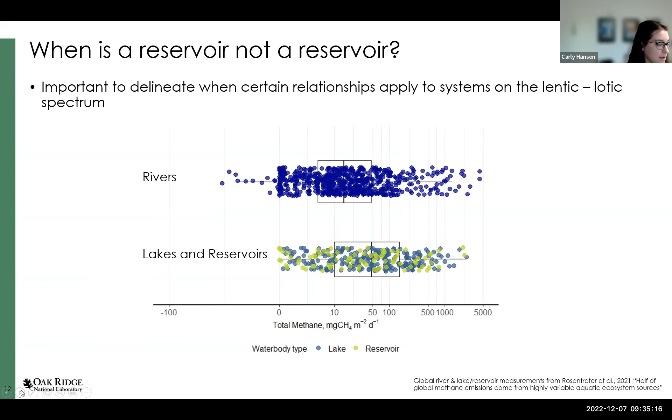Another challenge tied to water body data is that reservoirs and managed water bodies don't exist in isolation. We saw a good example of this with the research areas that Professor Chen talked about, a cascading system of reservoirs. When you have these links between reservoirs, there's a lot of connections and coordination, and these are sometimes viewed as complexes of facilities that have to coordinate operations for specific purposes.

So just an important consideration: reservoirs are so often connected to either each other or other water bodies. They don't exist in isolation.

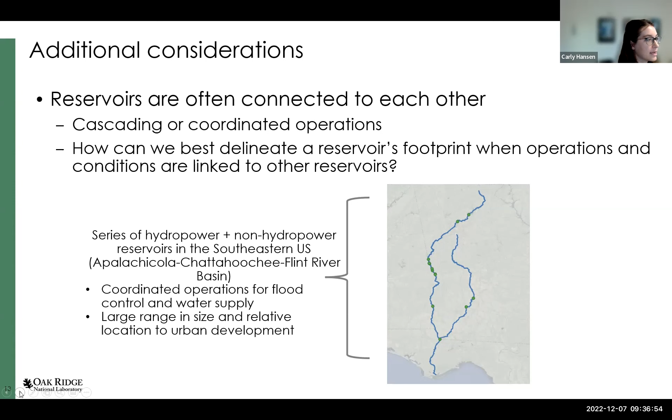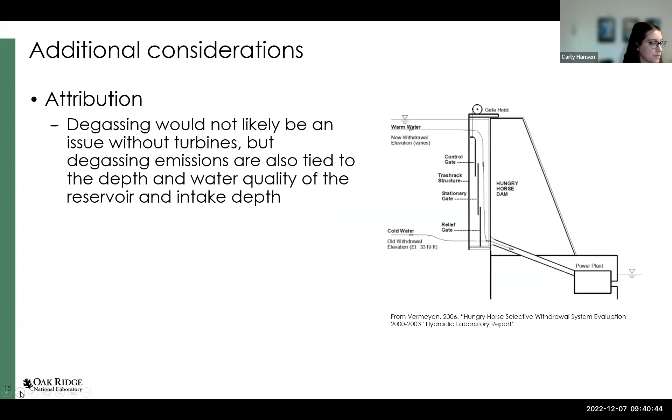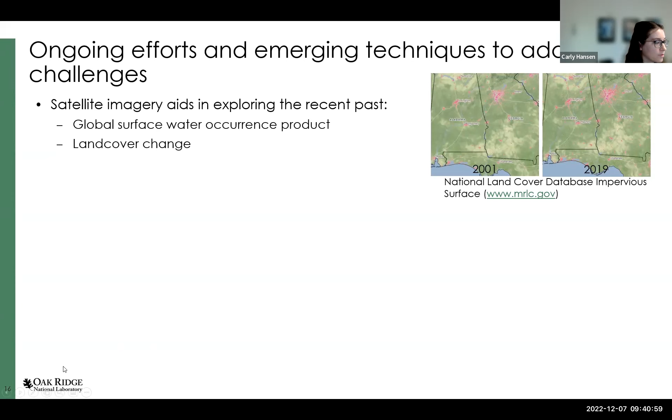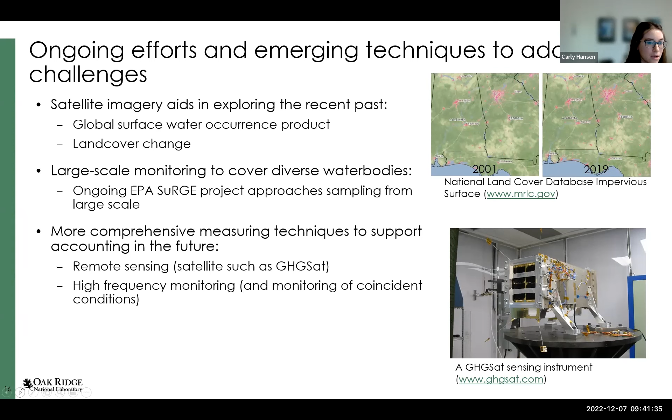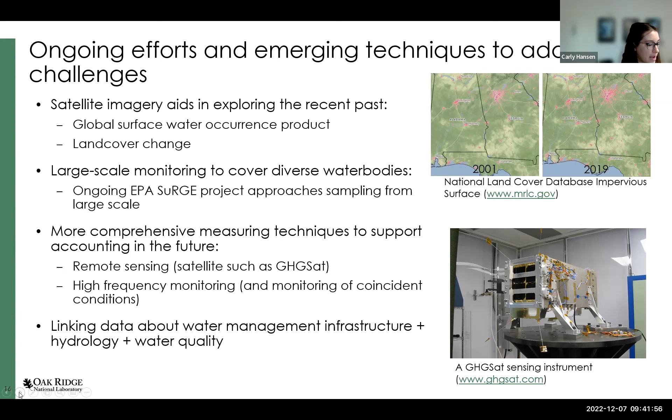So of course, I just spent a lot of time talking about the challenges, but there's some light at the end of the tunnel. Satellite imagery can really help get a lot of information about how things are changing over the past and even on a near real-time basis. There are a lot of efforts for large-scale monitoring and increasing our coverage of observational data. And to go along with that, there's also a lot of remote sensing that can support that - satellites and aerial measurements from the GHGSat instrument, for example. There's a lot of high frequency monitoring networks being established that could be really powerful for understanding coincident conditions affecting emissions. And finally, there's a lot of progress being made in water management, infrastructure, hydrology, and water quality data, bringing together all of that information so we're better able to look at water bodies and reservoirs and their emissions on large scales.

And I just want to end by acknowledging the rest of my team, the principal investigator, Natalie, and the team of people working with me at Oak Ridge National Lab, as well as the folks at the International Hydropower Association who have been developing the GRES tool.